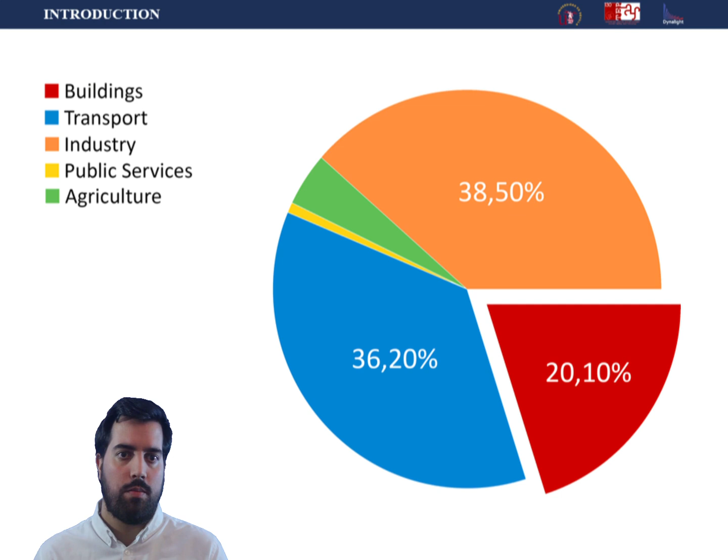In Spain, around 20% of the electricity consumption is made by buildings, and moreover, 28% of it is due to the electric lighting, so making predictive computational models analyzed with dynamic metrics can mean a decrease in the electricity consumption, both due to the window size optimization and the use of smart controls of the architectural spaces.

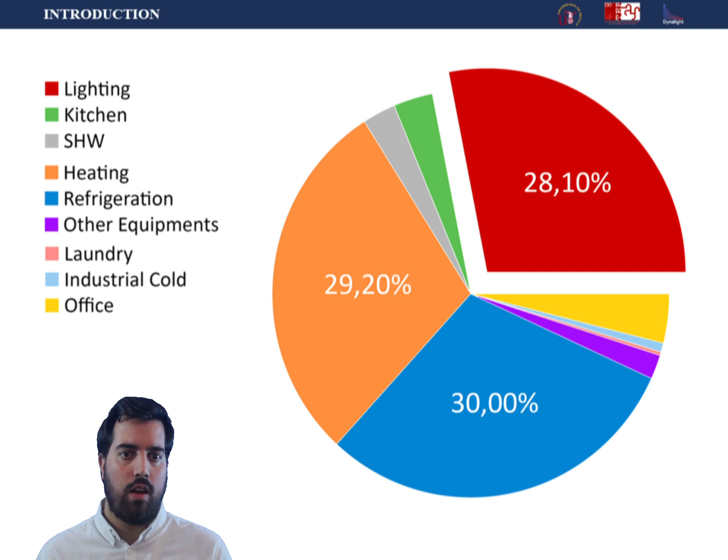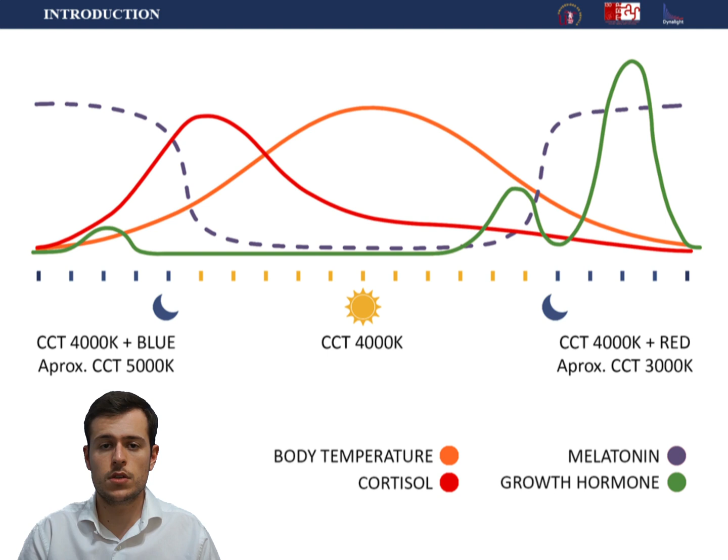Nevertheless, there is a casuistry that dynamic metrics do not consider, as many buildings have a temporary use throughout the year. For example, educational centers that have no use around the summer period. This type of building is highly widespread throughout Andalusia, where there are more than 7,000 public schools. So saving part of the energy consumed by electric lighting systems of these schools can result in large-scale energy savings. However, this dissociation of activities from daylight carries some health problems among humans, increasing the risk of developing some diseases strongly related to the desynchrony of the circadian rhythms.

The aim of this work is to develop a deeper research on the potential of a new lighting dynamic metric, the partial daylight autonomy, which has been previously introduced at the ICCAN of 2019. Thus, it will be possible to consider the non-use period of a space and so not oversize the penetration or amount of natural light that comes through its windows, allowing to fit window gap size to the real conditions and necessities of the room.

So as to verify the impact of this metric, it has been applied to a case study based on secondary school multipurpose classrooms, defined in a previous article, in order to check its behavior considering some concrete guidelines explained in a methodology based on mathematical and comparative analysis of results.

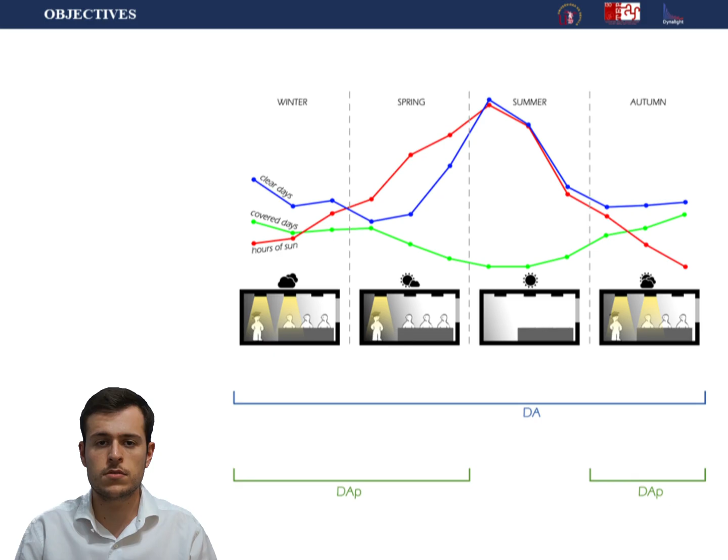The case study, which has been defined in the previous paper, consists of a conventional secondary school multipurpose classroom of 8 meters wide, 6 meters deep and 3 meters high, having a window gap size of 7 by 1 meters, meaning 30% of the vertical plane, oriented north and centered in the facade.

The model has been located in Madrid, Spain, with a standard academic year, which means not considering weekends, and an uninterrupted schedule from 8:30 in the morning to 6:30 in the afternoon, and taking into account the DST. All that considering the recommended illuminance of 500 lux.

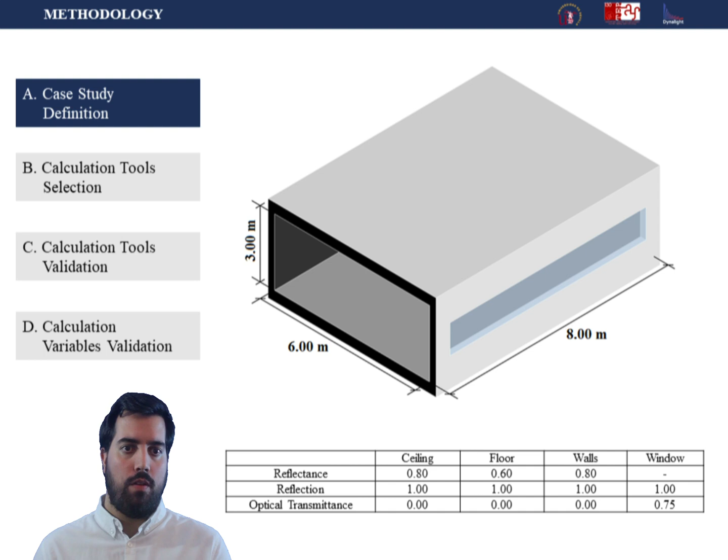Also, a 30 by 30 centimeters calculation grid has been placed 60 centimeters above the floor, and the results are obtained from the middle section of the facade. This program works with the daylight coefficients defined by Mardaljevic and has been validated by the international scientific community. Rhinoceros 5.0 has been used to create the 3D model, as it is the interface that supports DIVA.

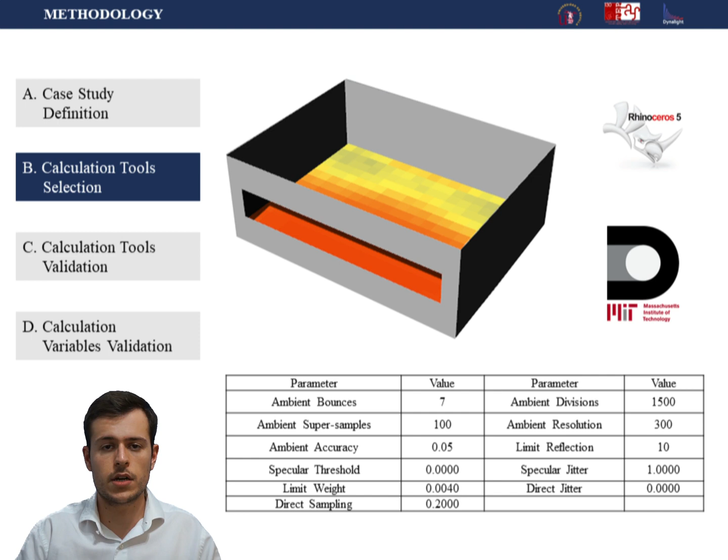The selected tool for developing the simulators is DIVA 4.0 version, a dynamic lighting calculation software developed by MIT, based on the Radiance calculation engine created by Christoph Reinhart. The validation process of the calculation tool is the one explained in the previous publication, by comparison with a real model based on a test that was monitored for a full year.

For this validation, the calculation database and the experimental results are based on the previous publication of Campano and company using the mentioned test cell. The cell is located in Seville, Spain, and it's characterized by dimensions of 2.4 meters wide, 3.2 meters deep, and 2.7 meters high, with a window gap of 1.16 by 1.08 meters corresponding to 20% of the vertical plane, centered on the facade and facing south.

The 3D model is generated with Rhinoceros and subsequently calculated using DIVA, thus obtaining the daylight autonomy values for an uninterrupted schedule from 8 o'clock in the morning to 17 o'clock in the afternoon, including DST, and two different illuminance thresholds of 100 and 500 lux.

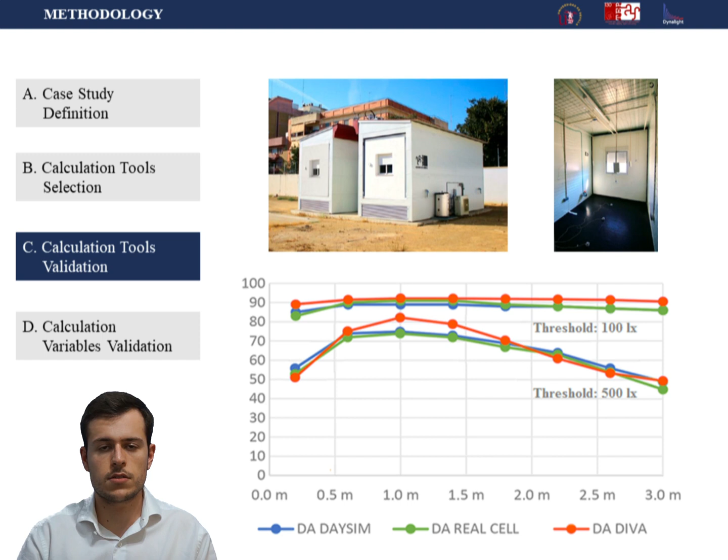Afterwards, a comparison is made between the previous values obtained, both measured and computer calculated with Daysim, and those contained in the present study with DIVA. The maximum divergence among the values is lower than 10% in the worst case, so the validation of the tool is satisfactorily correct.

To develop this study, several variables have been considered, generating the following cases grouped into two sets. The first group refers to physical variables such as window size, which are 30%, 45% and 60% of the surface of the facade, and the reflectance of the materials, categorized as bright for high reflectance materials and dark for low reflectance materials. The second set deals with the variables of the model, such as the window orientation, which are north and south. All variables combined contribute to develop a case study with 12 variables.

Lastly, these cases are studied with seasonal occupation schedules, simulating the full standard year without holidays for the calculation of daylight autonomy, and on the other hand, the same year without occupation during July and August for the calculation of the partial daylight autonomy, or DAP, according to the Spanish summer vacation period.

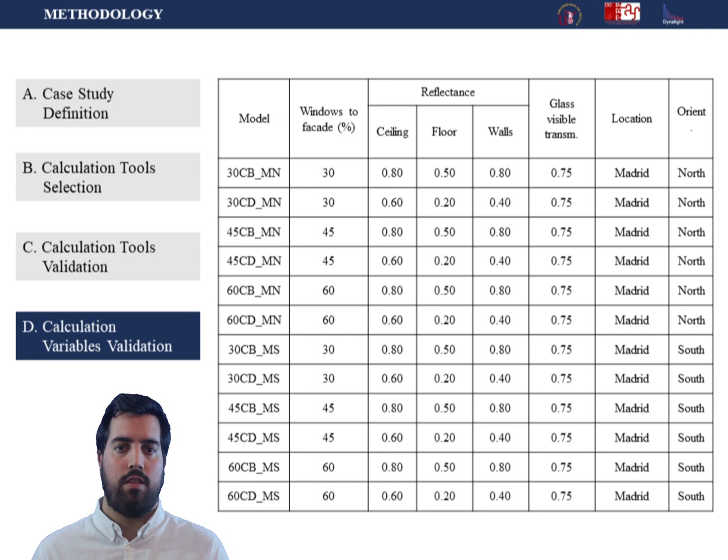The results obtained from the simulation process have been analyzed in two different ways. On one hand, a graphic analysis has been carried out studying the pattern of each graphic to group them according to their behavior. On the other hand, a deviation analysis has been made, taking into account the mean and standard deviation of the calculation model with the aim of understanding how each model behaves and what is the numerical impact of the use of DA against the use of DAP.

Each casuistry, the ones in table 6, a total of 12, has been studied with DIVA twice, one considering all year occupation, so obtaining DA, and another taking into account the non-use periods, obtaining DAP. The four behavior graphic groups are: Group A, where it's possible to find decreasing curves, DA always being higher than DAP as they get away from the window, yet never reaching the value of 0. All the models with the bright reflectance level can be found in this group.

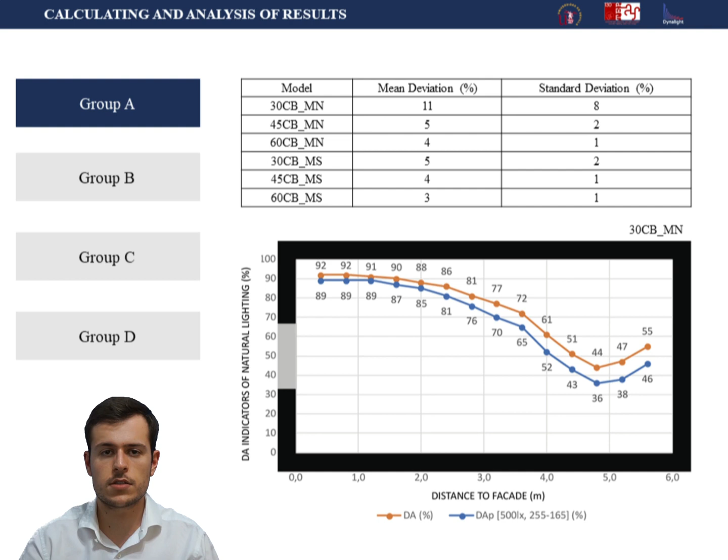Considering the values of DA and DAP, the deviance of every calculation node has been calculated. It's worth noting that a shorter interval of days will give a higher divergence between DA and DAP. Furthermore, those specific deviations have been taken in order to develop a proper deviance analysis, obtaining a mean deviation and a standard deviation, and this has been done with all the results.

In Group B, graphics can be found which, though following the same behavior as those in Group A, reach the zero value as getting closer to the room back. The majority of dark reflectance level models are found in this group. Following the method defined for Group A, the mean and standard deviations have been obtained for every graphic contained in Group B.

In Group C, it is possible to find graphics with a similar beginning to the previous groups, but as they keep moving away from the facade, there is a crossing point of the curves so that the DAp gets higher than the DA from that point to the background. A reason for that is associated with the elevation angle of the sun in winter, compared to the one in summer, reaching a deeper penetration level to the background of the room and so obtaining higher illumination levels.

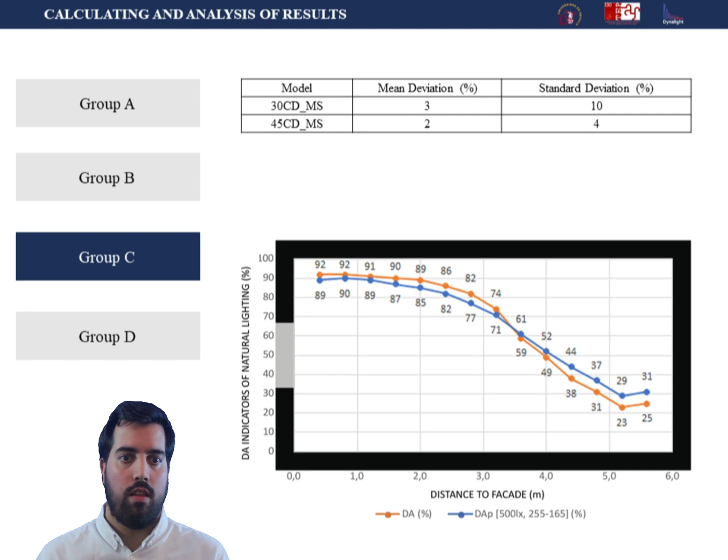A darker reflectance level and south orientation are the main characteristics for these graphics. Besides, due to that values line cross, it's possible to perceive the non-linear correlation between DA and DAp in many of the cases. Following the method defined for the previous groups, the mean and standard deviations have been obtained for every graphic contained in Group C.

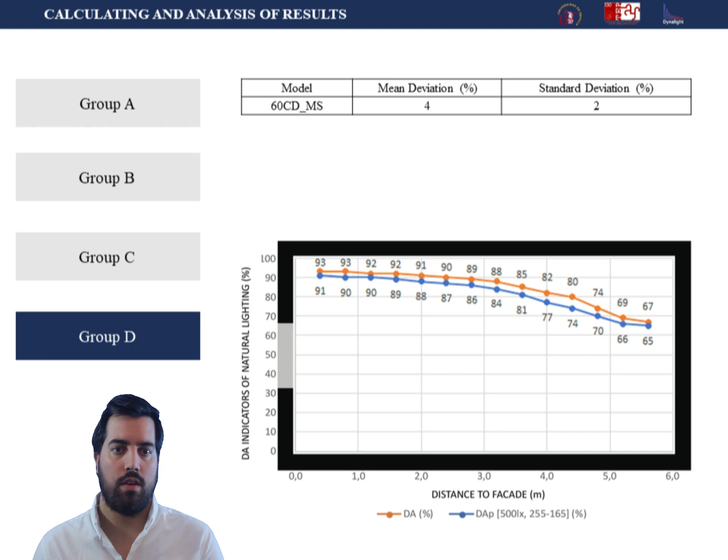In Group D, graphics can be found that follow the same pattern as those in Group A, although the values divergence is noticed to be decreasing as they get to the room back, tending to cross. If the depth of the case study room was higher, the behavior of this graphic would be as those in Group C, showing the cross of DA and DAp curves. Following the method defined for the previous groups, the mean and standard deviations have been obtained for every graphic contained in Group D.

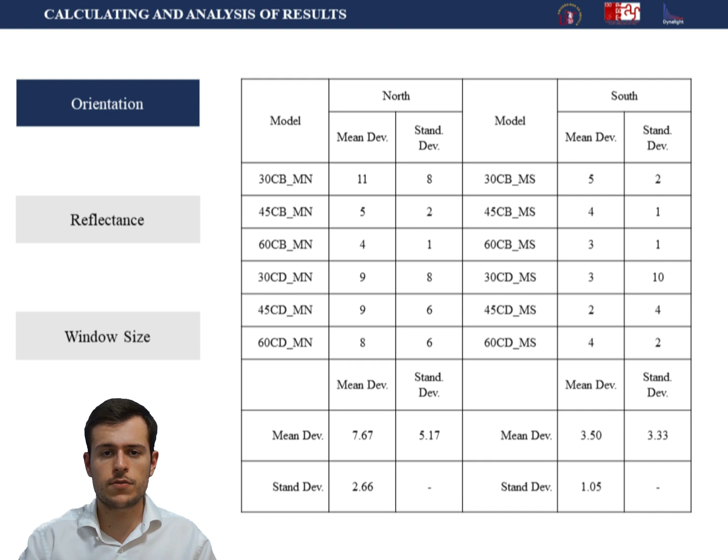Considering all the graphics and the divergence, a deviation analysis has been developed with the mean and the standard deviation specified previously, in order to be able to discretize which variables have a higher impact in the use or not use of DAp. They have been grouped considering the variables. About the orientation, the deviations are remarkable given that those in models facing north are higher, so it is possible to qualify the better efficiency of DAp for north orientation rather than south ones.

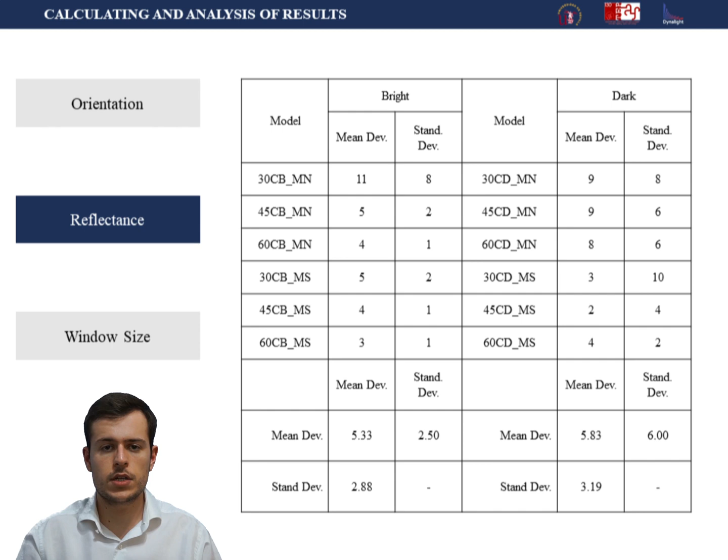Regarding material reflectance, variables deviation are found in the same range of divergence, so it is possible to affirm that DAp would mean an improvement whether the materials of the space have a high or low reflectance. About the size of the window, the deviations are similar and so efficient independent of it. Yet, a slightly higher deviation can be appreciated for models with 30% window size rather than those with a 45% or 60%.

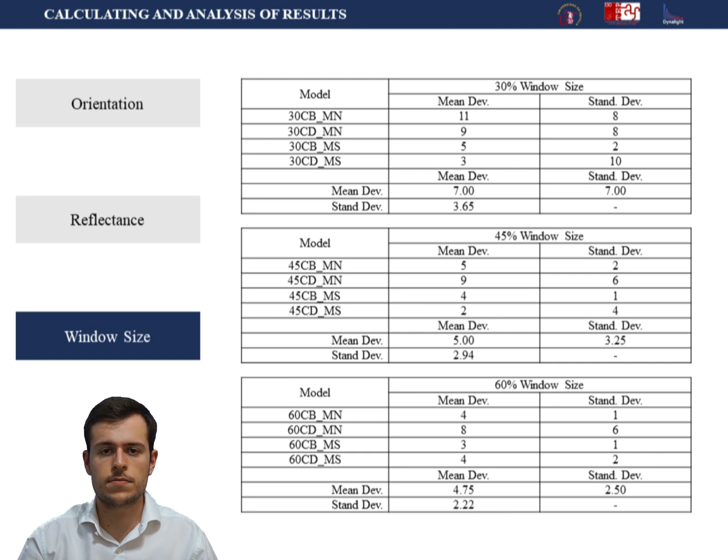According to the results and deviation analysis, the use of this new dynamic metric, partial daylight autonomy or DAp, means a better fit in the results of daylighting calculations for spaces characterized by seasonal use. In accordance with the previous statement, the usually lower value of the DAp metric means that a building with a seasonal use requires a higher energy consumption in electric lighting than estimated during the period of operation, in comparison with a continuous use building, due to the fact that the summer daylighting is not considered into the calculation.

Quantifying the previous deduction, the autonomy of daylight can fall up to 24% depending on the orientation, window size, and the study point. Furthermore, according to the previous analysis, a higher level of exposure to diffuse radiation on the model means a higher divergence between DA and DAp indicators, so north-oriented models are the best example for the use of the DAp metric. On the other hand, reflectance and window size do not play such a big role in this decision, yet its use is still an improvement in the results and more faithful to the real necessities.

Besides, the nonlinear correlation between DA and DAp metrics has been demonstrated, meaning a huge importance of the use of this new dynamic metric that cannot be defined directly from the DA. To sum up, this research demonstrates the great importance of considering the non-use periods of a space in order to develop its lighting study, so the use of this new partial daylight autonomy metric becomes highly recommended.